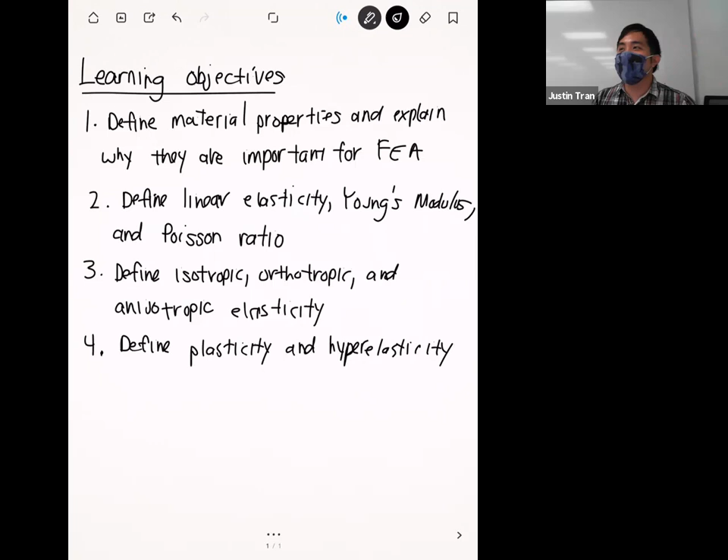Okay, right, so let's start talking about material properties.

Up to this point, we've talked about what I consider the ingredients to every finite element simulation. We talked about meshing for a little bit, we talked about boundary conditions last Wednesday. The last essential ingredient is material properties, and these are the ones that I think most people either forget or don't really put a lot of thought into. But there's actually a lot of depth and complexity with material properties, because especially nowadays, a lot of the cutting edge engineering doesn't use simple materials anymore — there's a lot more composite materials, more complex materials.

You have things like additive manufacturing, 3D printing, which has its own batch of material properties. So where a lot of times when you're first learning finite elements, you don't give a lot of thought to material properties, I'd say a lot of the cutting edge out there is thinking about how we can best model these materials in a realistic way.

All right, so first let's give some definitions to this. When I talk about material properties, I'm talking about the physical parameters of the material that affect how it will respond to external stresses.

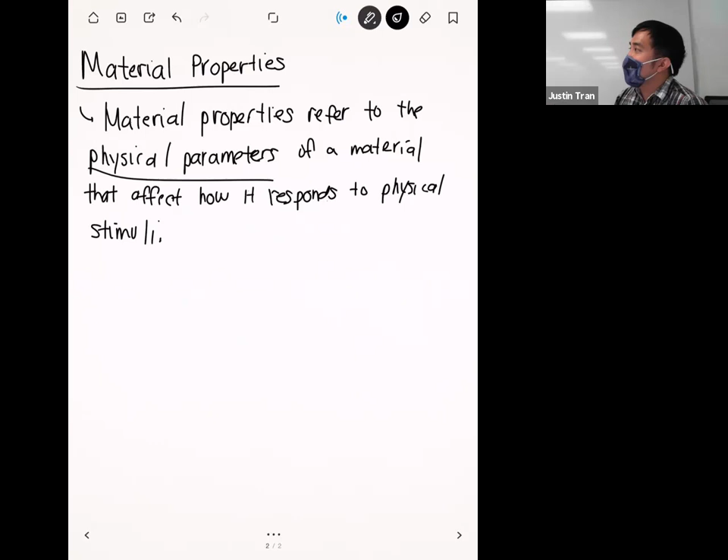So when we talk about material properties in finite elements, what we're interested in is what are the numerical, quantitative ways that we can describe and differentiate different materials from each other. That's what I refer to as physical parameters—those numerical values get plugged into the governing equation, and they're going to affect ultimately the finite element result that you get.

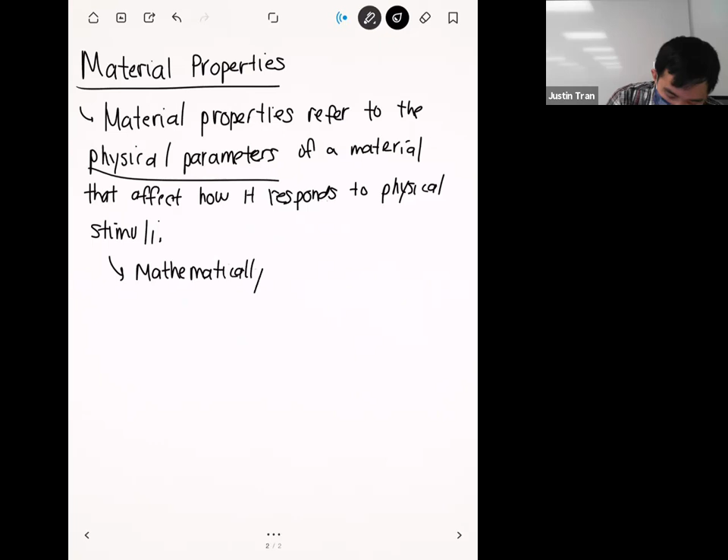And so mathematically, your physical parameter or material properties basically enter into your governing equations as modifying coefficients.

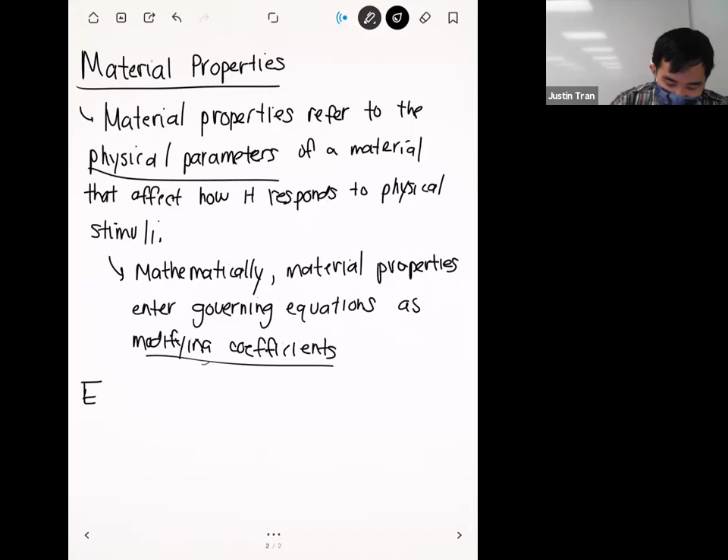The simplest example of this would be our stress-strain relationship. One thing that's central to linear elasticity is that we have this relationship between stress and strain, and the material property here that affects this solution is the Young's modulus—this E right here is a material property.

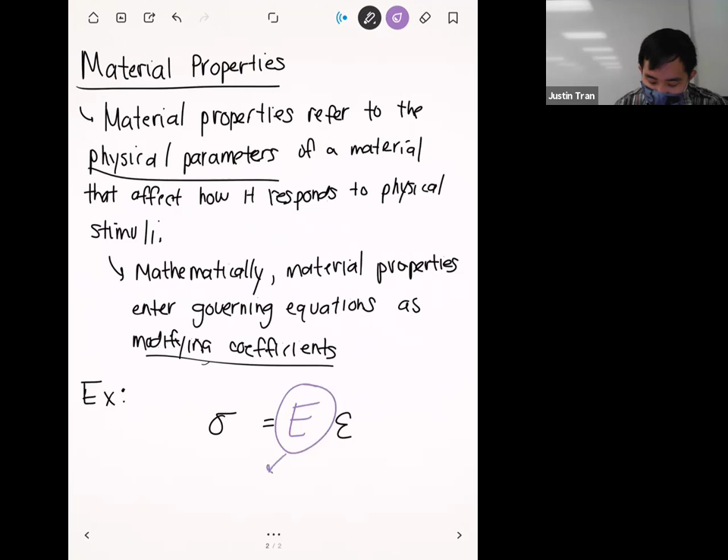It obviously affects our solution—depending on the Young's modulus, it's going to give us different values of stress for whatever values of strain that we put in. But it's also a quality or characteristic of whatever material we're using. If we're using aluminum, that's going to have a certain Young's modulus, but if we change the material to copper, that's going to have a different Young's modulus. So these are parameters that are characteristics of the material, and they affect our solution.

Those are the two ways that I think of material properties in finite elements. This is as simple as it gets—the properties of the material are these numerical values, but how they enter into the equation, that's something called a material model.

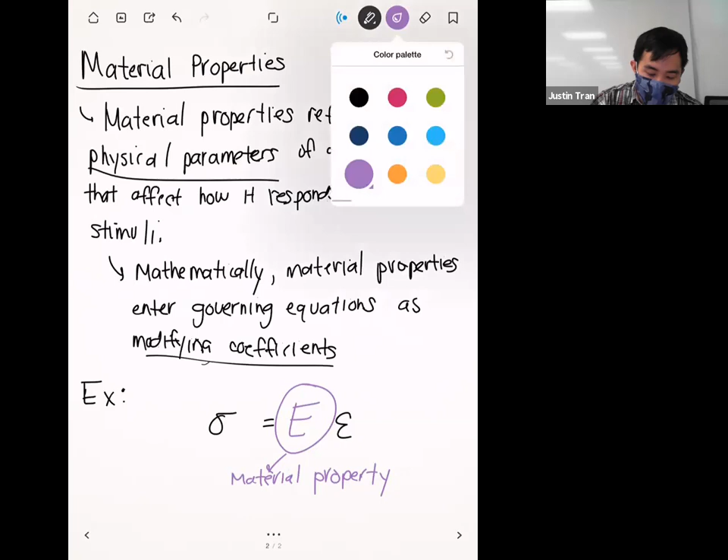We won't talk too much about material models because that's much more of a material science thing, but I will introduce a little bit of what tools are available.

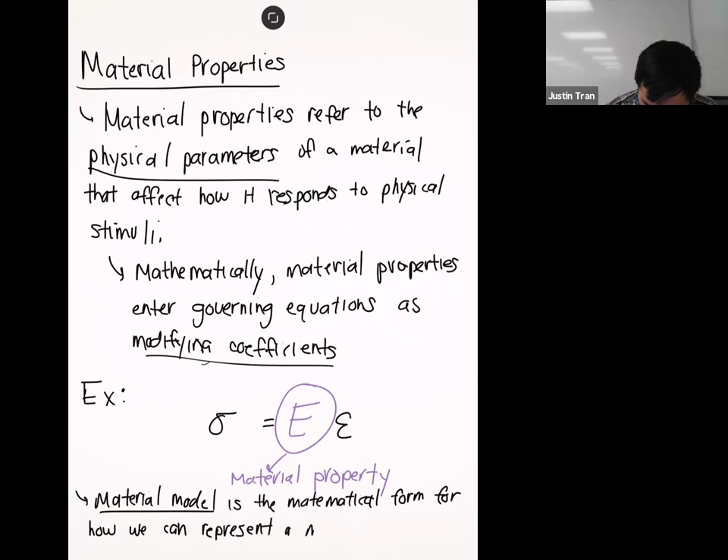Material models are things like linear elasticity, anisotropic elasticity, plasticity, and the last one we'll go over today is hyperelasticity. A material model is basically the equations that you use to describe the material, whereas the material properties are the numbers and the actual parameters that you plug into these equations.

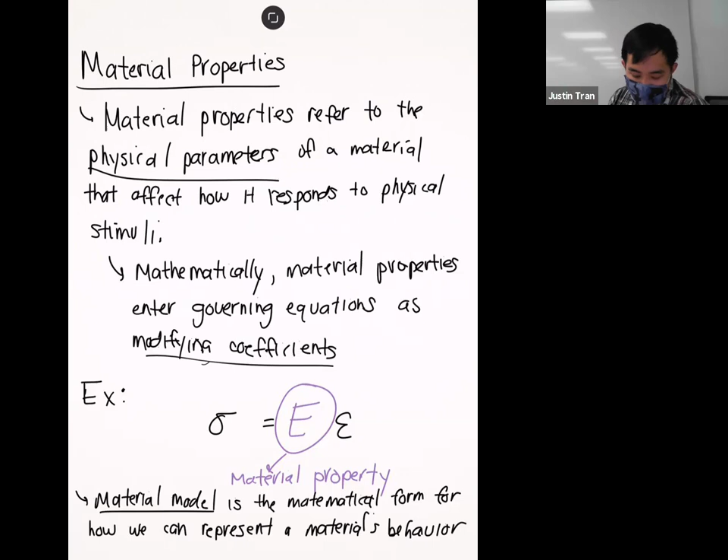As a simple example, this whole equation right here—this is the equation for linear elasticity, which we've talked about quite a bit up to this point. Linear elasticity as a category, as an equation, that's the material model. In other words, we're saying the material is going to follow this equation—that's what we call the material model.

Whereas the parameter that we plug in, which is the E, that's the material property. I want to make that definition clear because I'm going to be using those two terms quite a bit today. Knowing the difference between a material model versus a material property is really important, because within ANSYS there are lots of different material models available, and for each model you have to plug in the right parameters or properties to it.

Any questions on this? Okay.

The way that you usually interact with this in ANSYS is that you're going to probably look up your material in a database. Unless you're an alchemist or something coming up with new materials, which is pretty unlikely, a lot of times you're going to be working with materials that are out there. A lot of ways that finite element engineers use material properties is through databases.

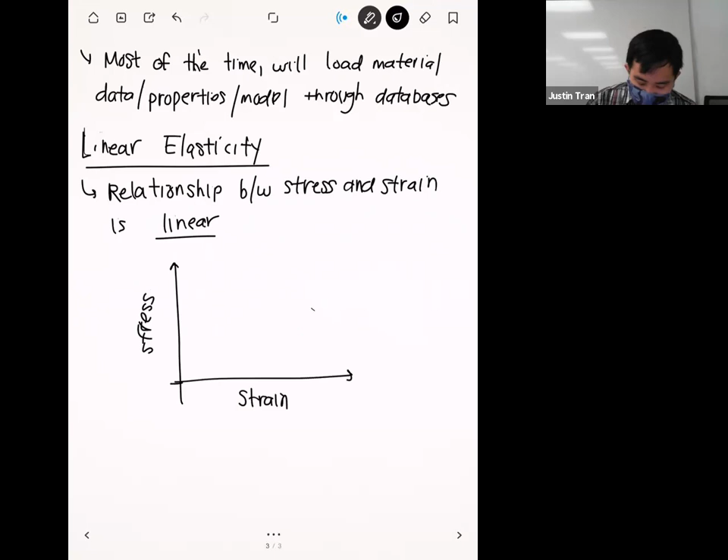Then we wrote out the equation for this. In 1D, we basically just have Hooke's law, where stress is equal to the Young's modulus times the strain. Linear elasticity is probably the simplest material model that you can have.

In linear elasticity, or at least isotropic linear elasticity, you only really need to specify two properties.

The first parameter is the Young's modulus, the one we have up there. Typically this has the symbol E.

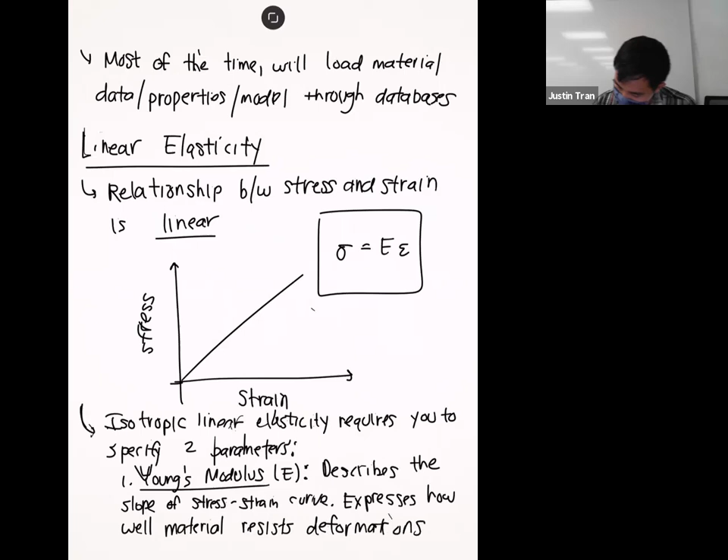If you have a material with a high Young's modulus, that tells you it's going to take a high amount of force to cause it to deform. Really strong materials, like a lot of the metals, like steel and aluminum, have fairly high Young's modulus. But compare that to something soft, like Play-Doh or string cheese. It doesn't take a lot of force to stretch string cheese, that's how they design it so you can pull it apart. Those materials will have a much lower Young's modulus because they provide very little resistance to deformation.

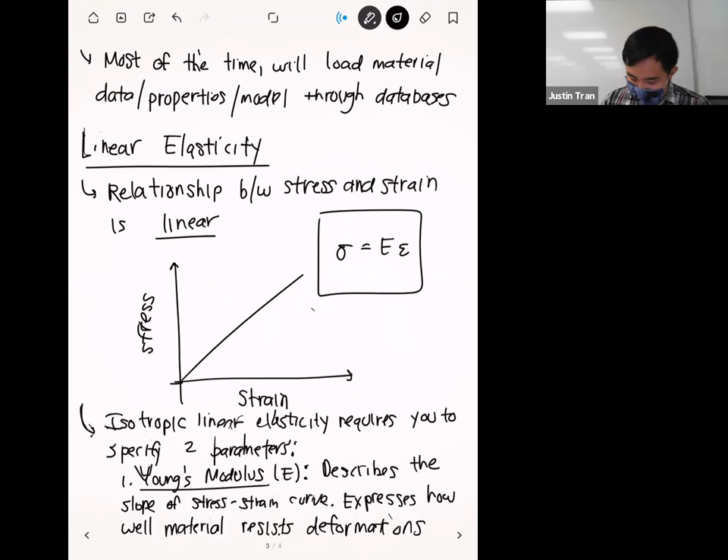Any questions on this? Okay, so that's the Young's modulus.

The other main property you have to specify is the Poisson's ratio. Poisson's ratio is strictly a multidimensional property. It never shows up in classical Hooke's law the way I always write it, because that Hooke's law is just for 1D. But whenever you have multidimensional elasticity, you need the Poisson's ratio.

The symbol we give Poisson's ratio is nu, this kind of fancy Greek V thing. I tried three times and it still looks like a V, but you've probably seen a nu before. So what Poisson's ratio measures is how much a material will deform in directions perpendicular to the load.

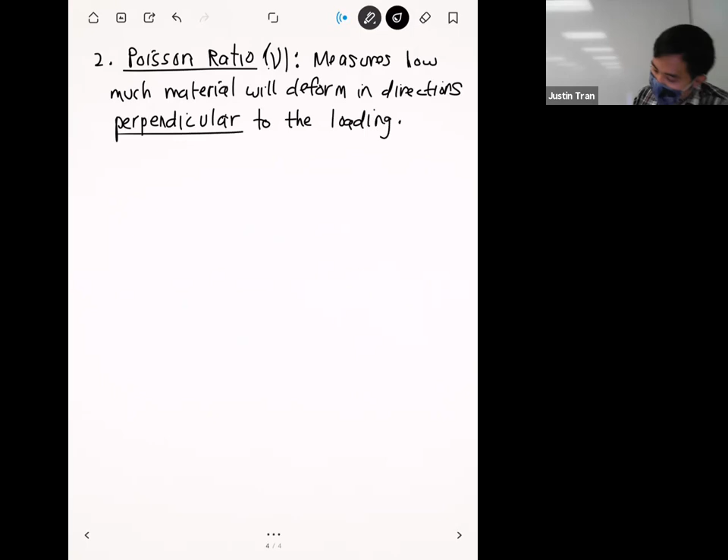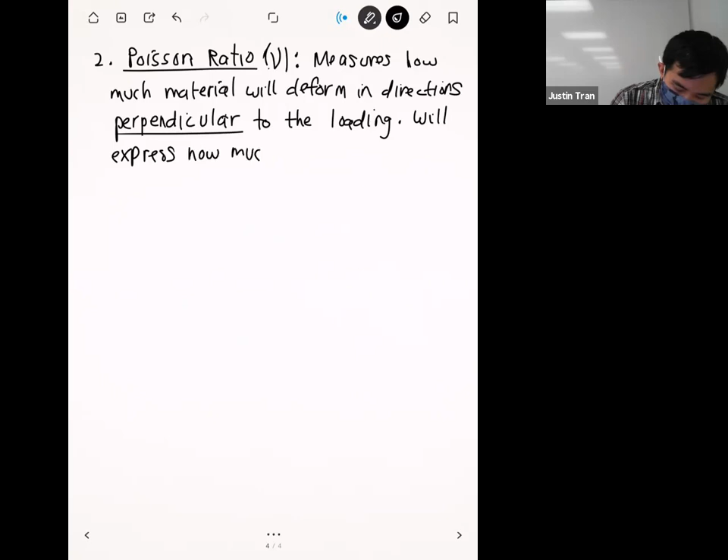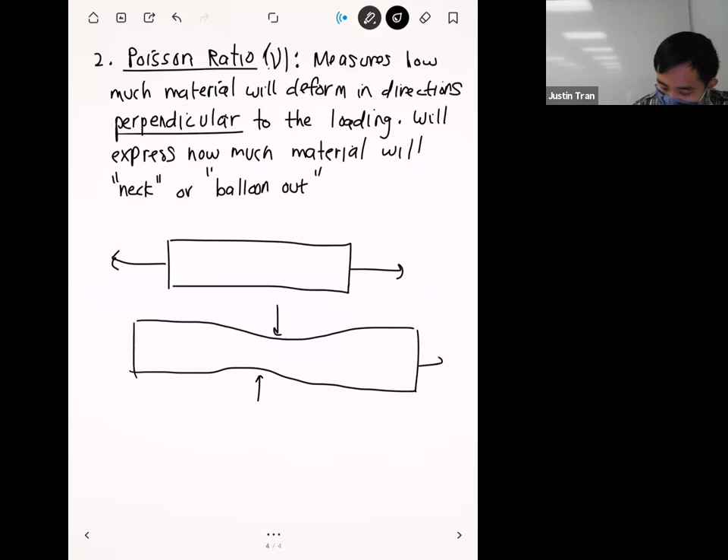I think the classical example will basically tell you how much the material will neck or balloon out. And I don't think those are the official terms, those are just the terms that I give it. So the classical example is, let's say you have a strip of material like this, and if you pull it like that, what the Poisson's ratio is going to tell you is how much this is going to happen. You stretch the material, naturally it's going to get longer. But because of conservation of mass, as the material gets longer, it also has to get thinner. This amount of necking right here is determined by the Poisson's ratio.

Poisson's ratio, because it's a ratio, doesn't have any units. And in fact, it's expressed as a decimal usually, like the range is between 0 and 0.5.

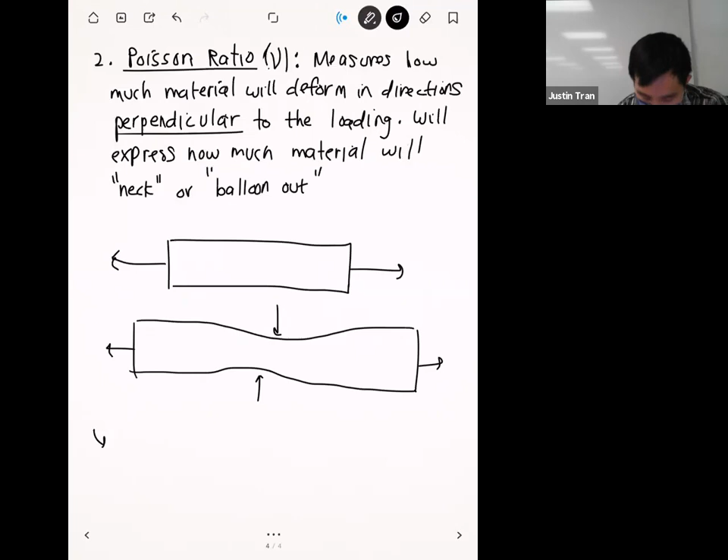So if you have a Poisson's ratio of 0.0, basically what this says is that there's going to be no perpendicular deformation.

And the max value for Poisson's ratio is going to be 0.5. And 0.5 means there's going to be lots of perpendicular deformation. And of course, that's not the technical term, that's just the Justin Professor Tran term, but that's how you can think of it.

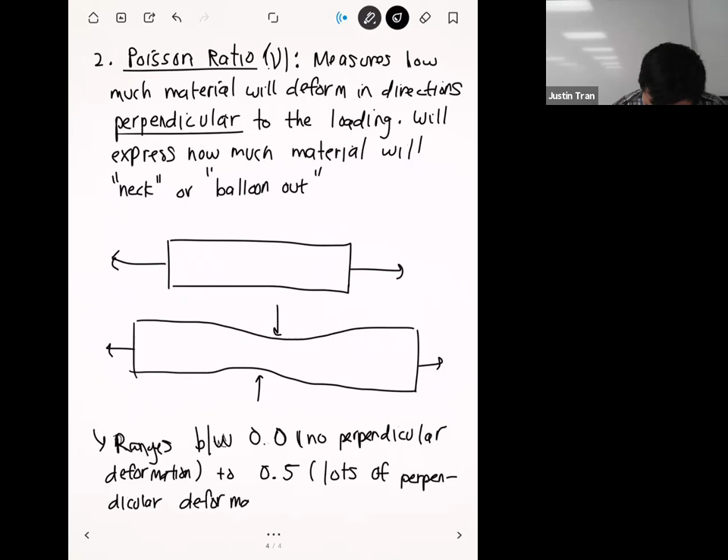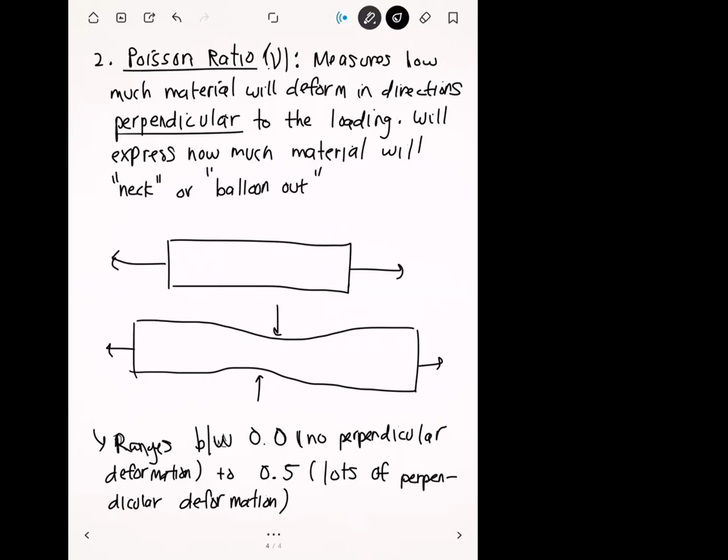So anytime you have an isotropic, linear elastic material, you need to make sure you specify these two properties, because otherwise it's not going to be complete. Remember when we did our activity 2, when we specified our aluminum 6061 material, we had to specify these exact two properties. And in that case, we looked up what the properties were in a table and we just filled that in. But ANSYS wouldn't have let us done anything if we didn't fill these two values. Any questions on Poisson's ratio?

I would say those two are the essential ones, so you have to fill those in. But there's actually a third material property that's with regards to shear. This is known as the shear modulus, which has the symbol G. The shear modulus kind of serves the same role as the Young's modulus, and it basically expresses how well this material will resist shear deformations.

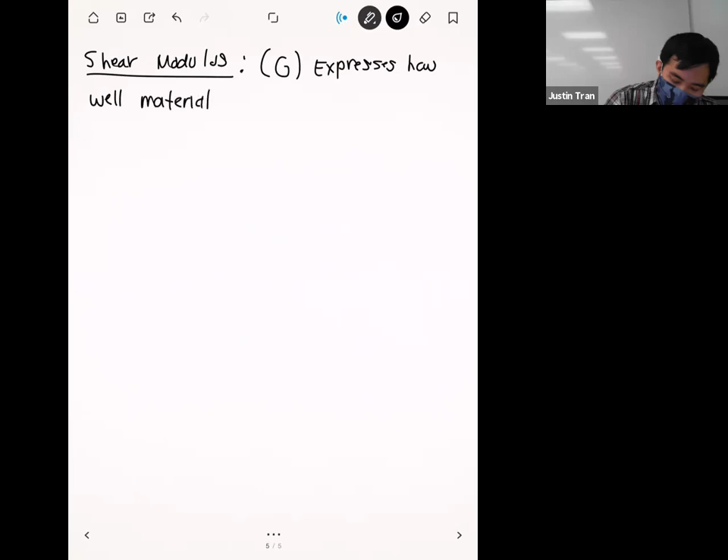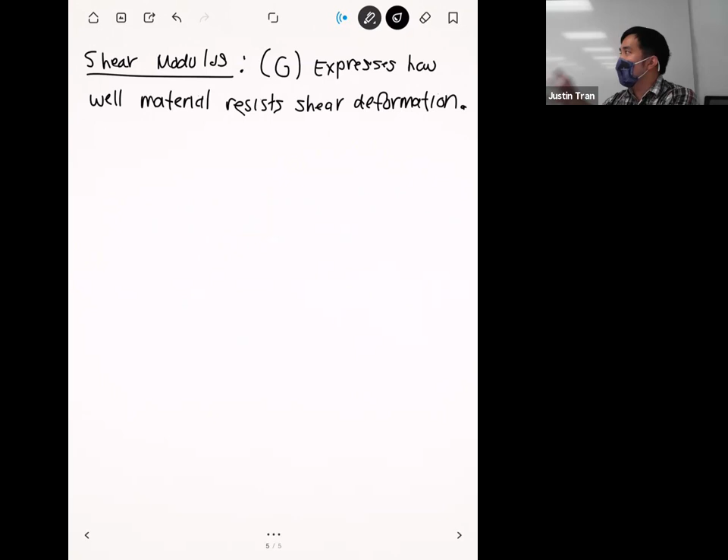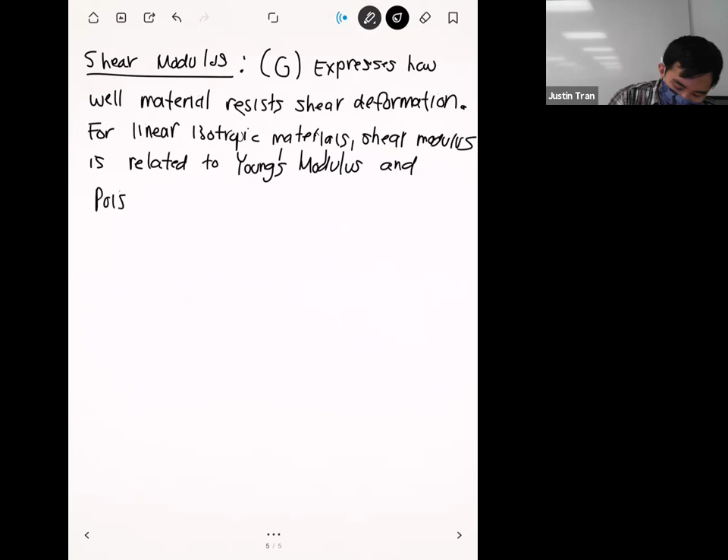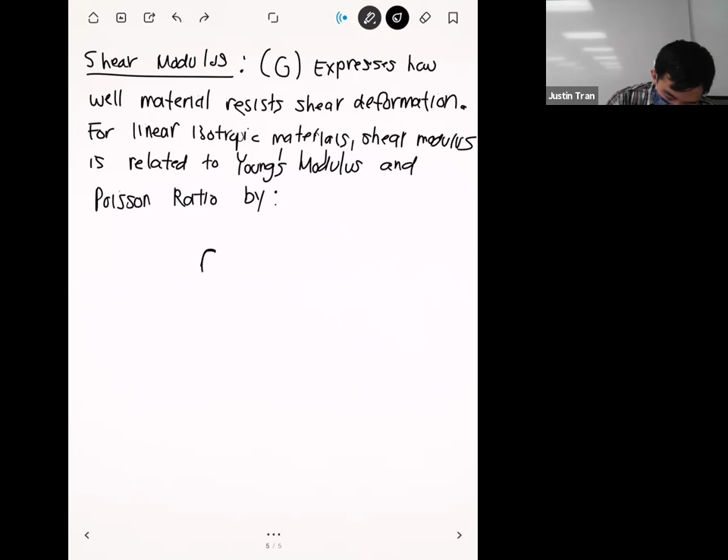This is another important part. Whenever you do any multi-dimensional linear elasticity, you need to specify the shear modulus. But you're probably wondering, in activity 2, we didn't specify a shear modulus, we didn't plug anything in. The reason for that is, for a linear elastic isotropic material, there is a formula that relates the shear modulus to the Young's modulus and the Poisson's ratio. So for linear isotropic materials, shear modulus is related to Young's modulus and Poisson's ratio by the formula G equals E divided by 2 divided by 1 plus nu.

And ANSYS knows to do this already. So if you input the Young's modulus and the Poisson's ratio, then ANSYS will automatically compute the shear modulus using that formula.

So in the chat, the question is, how do we determine if a material is linear and isotropic? Is there a table somewhere online? No, it's a good question.

Whether a material is linear and isotropic, it'll say so in the material data sheet. If you look up a certain material that you want to use, it'll tell you what the most common material model is for that. That's determined by the material, and it's not something you can determine just by looking at the material and saying that's linear and isotropic. The way this is determined is usually by a series of laboratory experiments where people characterize a material. And for the ones that pass the test for linear and isotropic, then they're listed as such.

It gets difficult when you're using materials that don't have a lot of data out there. This is becoming more common with people 3D printing a lot more stuff, and not all of those materials have data sheets, or the data sheets can be hard to find. That's usually when things get a little more difficult. But if you're using more classical materials, there should be a lot of data out there. For most metals, you're going to find material out there. For all the common woods, you're going to have material out there. A lot of common plastics, there's going to be some place out there too. But in a world with a lot of composite materials and new manufacturing techniques, it's getting a bit harder, but you can also make some educated guesses as well.

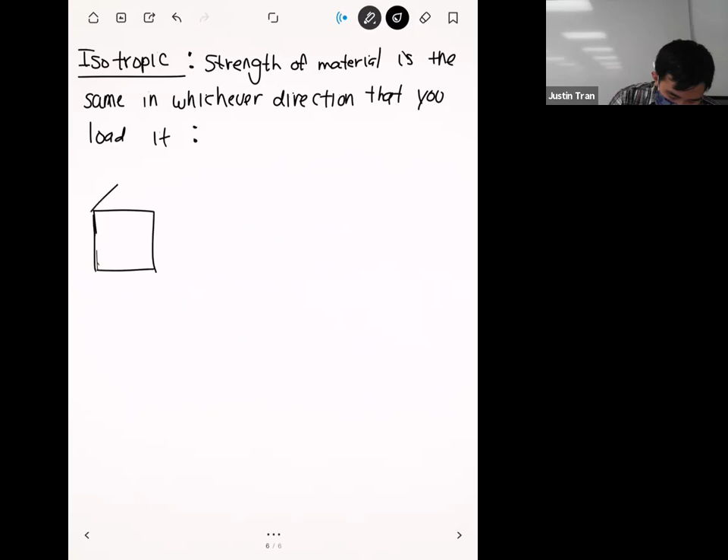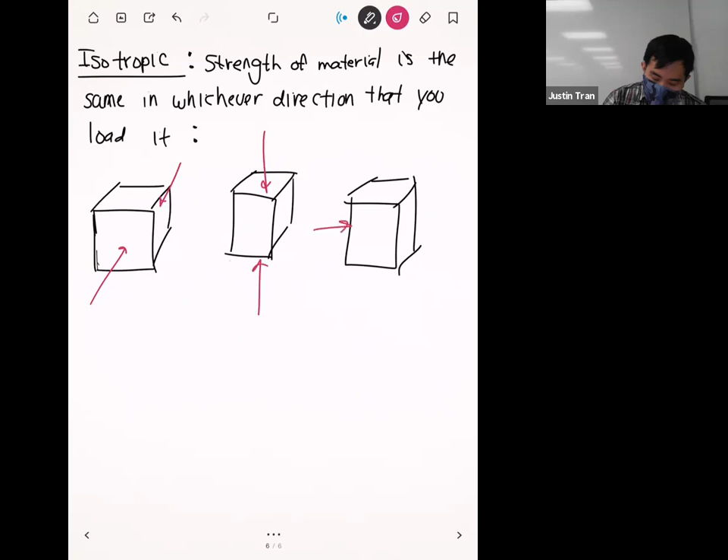If you have a cube of isotropic material—I'll draw the cube in three different configurations—the strength of the material, or the absolute amount of deformation you see, is going to be the same no matter if you load it in this direction, this direction, or this direction. In all those cases, because the strength of the material is the same in all directions, you're going to get the same amount of relative strain.

This is actually really useful because, if it weren't for isotropicity, you'd have to really pay attention to which direction the loading is coming from versus some other features of these materials.

This is especially important for materials that have fibers running through them, like wood. Wood came from a living tree at some point in its life, and the tree has fibers that run through it. The direction of those fibers changes its strength in different directions—if you load things in the same direction as the fiber, it's going to be really strong, but if you go in different directions, it's not as strong. We'll talk a bit later about how we model that.

But first, I want to talk about plasticity. Staying on the topic of linear elastic materials, we know the stress-strain relationship starts out as a linear line. But once the strain exceeds the elastic limit, the stress-strain relationship changes—instead of being a nice line, it starts to flatten out a little bit.

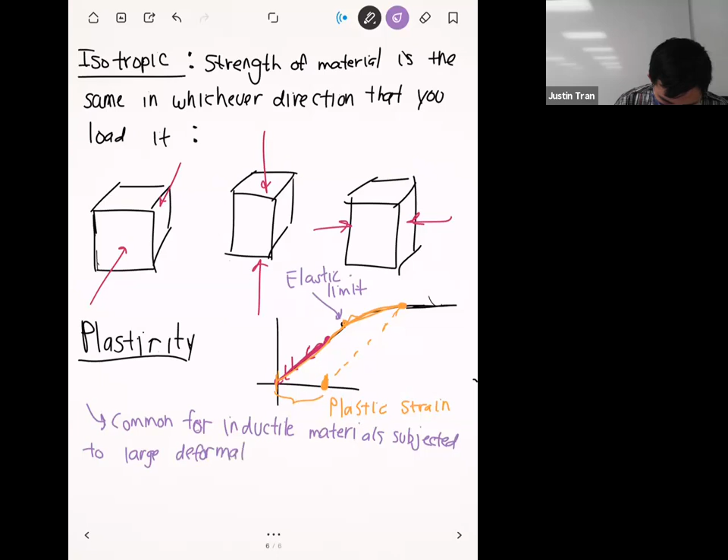And so if you have plasticity, or if you have plastic deformation that's occurring in your model, you need to make sure you explicitly include that in ANSYS.

So if you think back to activity 2, when we specify the material properties for that aluminum, that aluminum is not equipped to do any kind of plastic deformation, because the only material properties we assigned to it were those for isotropic linear elasticity. So if you wanted ANSYS to account for plastic behavior, you have to manually include those properties within ANSYS.

And I believe we talked about it later. Actually, I'm going to skip around a little bit. Any questions on this?

And so this graph, you guys have seen it before in a strength of materials class. But this is only relevant for 1D stress strain. In ANSYS, in finite elements, oftentimes we're working with 2D or 3D models. And so in those situations, how does ANSYS determine whether you've exceeded the elastic limit? What you use is the equivalent stress, which we've seen before.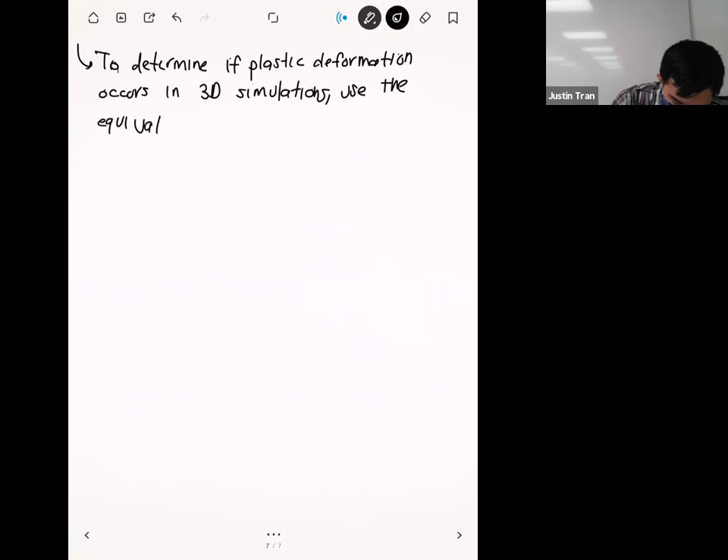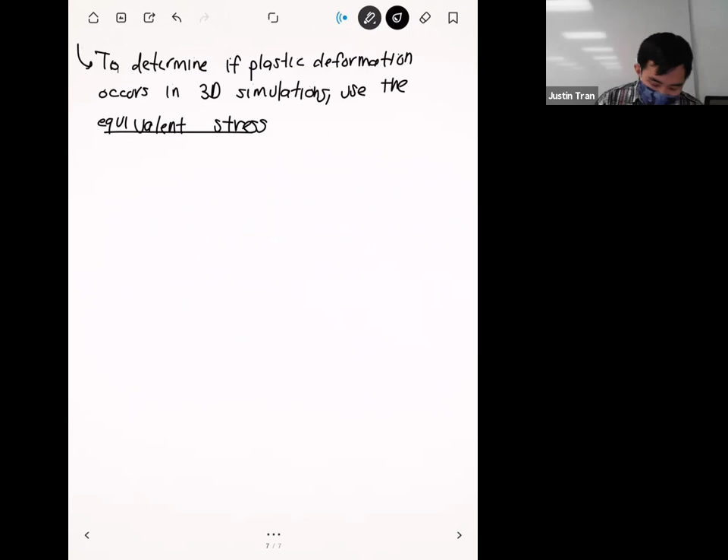Another name for the equivalent stress is the von Mises stress. Named after the dudes that discovered it, I guess. I don't know if he's related to the supermarket, but it's possible. All right, so the formula for the von Mises stress is square root of one half of sigma xx

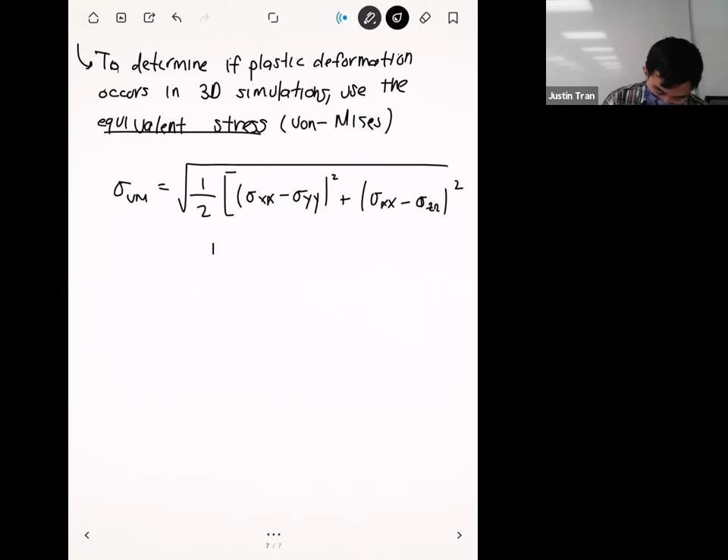minus sigma yy, where these are the normal stresses in the x and y direction, squared, plus sigma xx minus sigma zz squared, plus sigma zz minus sigma xx squared. And I think there's also more contributions here from the shear stresses as well, though unfortunately I don't have it written down.

But I think we have the formula for von Mises stress in a previous set of notes too. Oh, these papers are out of order. That's why. I wondered, I was like, why am I doing stuff out of order?

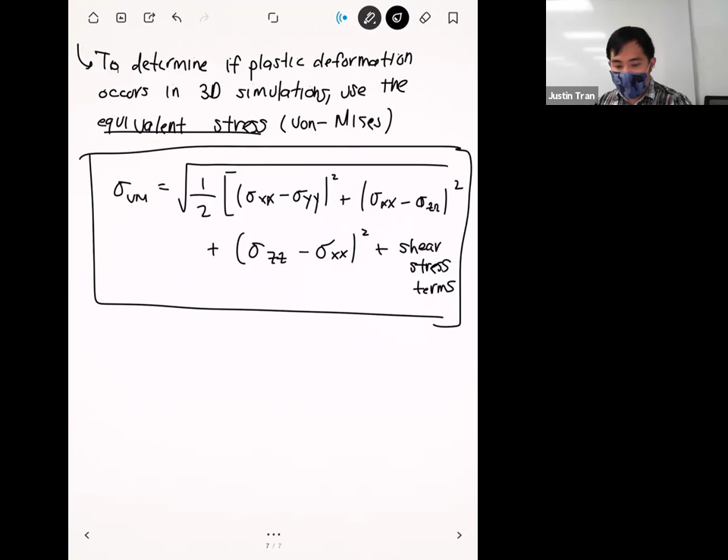All right, let me get organized for a second. Because in a lot of materials, whenever you specify plastic behavior in a material, you also have to specify how the material will harden after plastic deformation.

And so what hardening refers to is how much the elastic limit will increase in a material after plastic deformation.

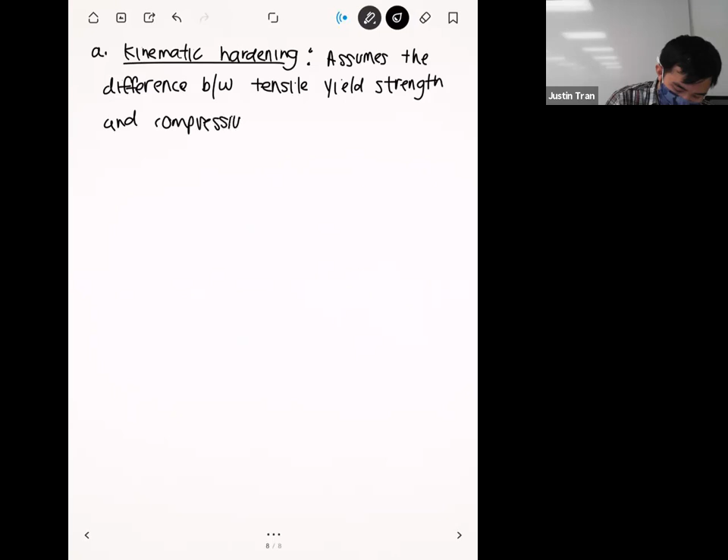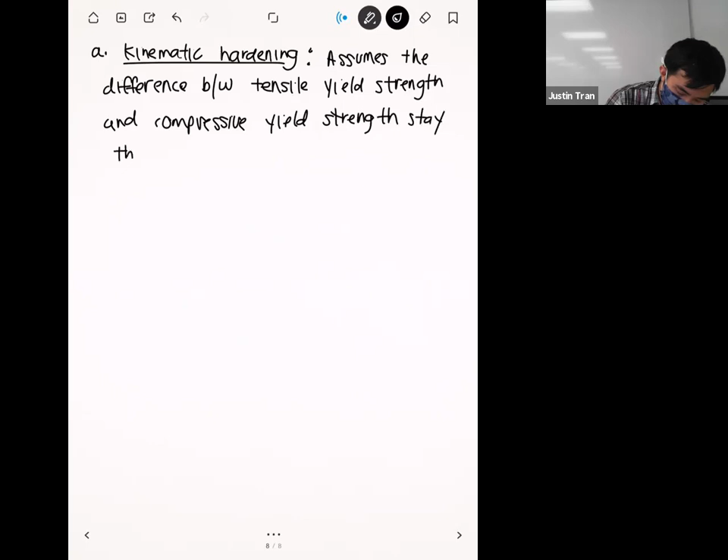And the other option for this is isotropic hardening. In isotropic hardening, this assumes that the tensile yield strength and the compressive yield strength have the same magnitude.

This is important because after plastic deformation, the elastic limit is going to go up. Whether the tensile yield strength or the compressive yield strength stay the same or different is determined by this. So if you're not sure, I would say the default option you should choose is isotropic hardening.

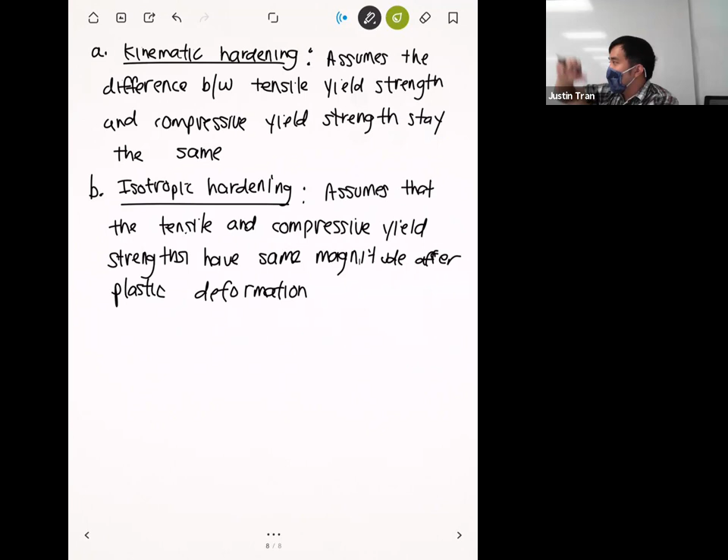In isotropic hardening, what happens is that if the elastic limit goes up, in most cases it's going to be tensile. So if the tensile elastic limit goes up, then the compressive elastic limit will also go up, and they're going to be the same in magnitude. So if you're not sure what to pick, I would go with this one because it's a little bit easier to interpret.

But if you have a material that has different properties in compression and tension, one particular material that does this is bones in your body. Bones are much stronger in compression than they are in tension. So if you know your material has a certain property like that, that might be a good one to use kinematic hardening for. But for most cases, for most metals and things like that, I think isotropic hardening is a little bit easier to do.

That's one thing you have to specify in ANSYS. When you specify plasticity, you have to specify what kind of hardening behavior that you expect. And the other thing you have to specify in ANSYS is how the shape of the stress strain curve changes.

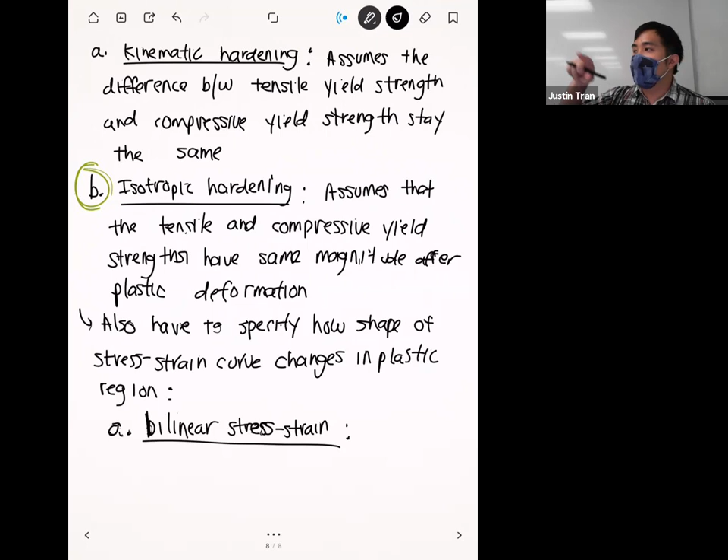This one you also have two options for. The first option is known as bilinear. In bilinear stress strain, what you assume is that once you've reached the elastic limit, the stress strain relationship just becomes another linear line, albeit with a lower slope than the previous one.

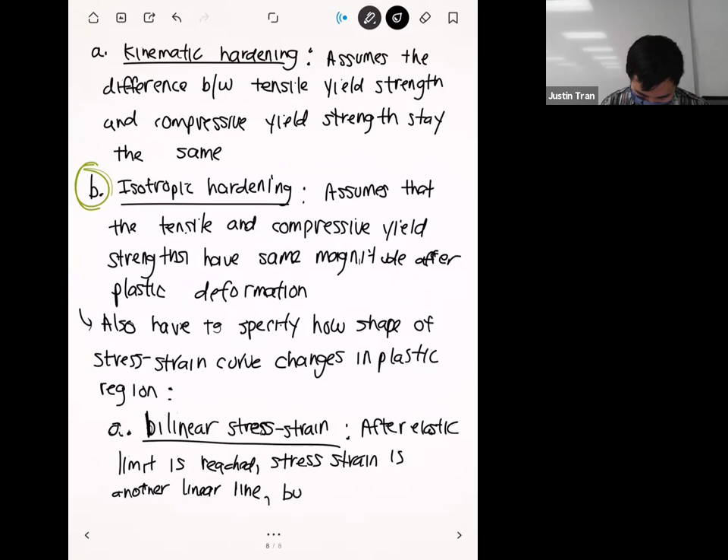So the bilinear stress strain relationship is a lot easier to specify, just because you only have to specify the slope of another line. I'll draw what that looks like on the next page. But before we get there, are there any questions on this?

That's the simplest one because it's the least amount of data you have to put in, but it's also the most crude one. For most plastic deformation that you guys have seen, the relationship looks more curved, so if you try to approximate that with a straight line, it's never going to be perfect. But it's a nice, simple way to do it.

The other way you can define the plastic stress strain is through a multilinear approach. In a multilinear approach, what you're doing is specifying basically multiple lines or multiple data points in the plastic region.

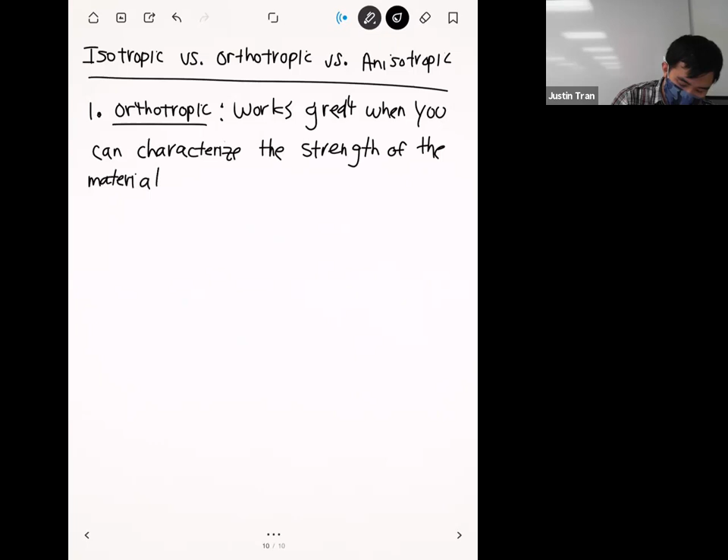Orthotropic material models are great when you can directly specify the strengths in each of the cardinal directions. If you can describe the strength in the X direction, the Y direction, and the Z direction, this works great. One example where orthotropic is used commonly to describe material properties is for wood.

Remember, with wood, we talked about earlier, that it has a very distinct fiber that runs down the length of the wood, and the wood is going to be a lot stronger in that direction than in the other ones. So if you're working with wood in your finite element simulation, you can arrange the wood such that the fiber runs in either the X, Y, or Z direction, and then assign different strengths to those directions.

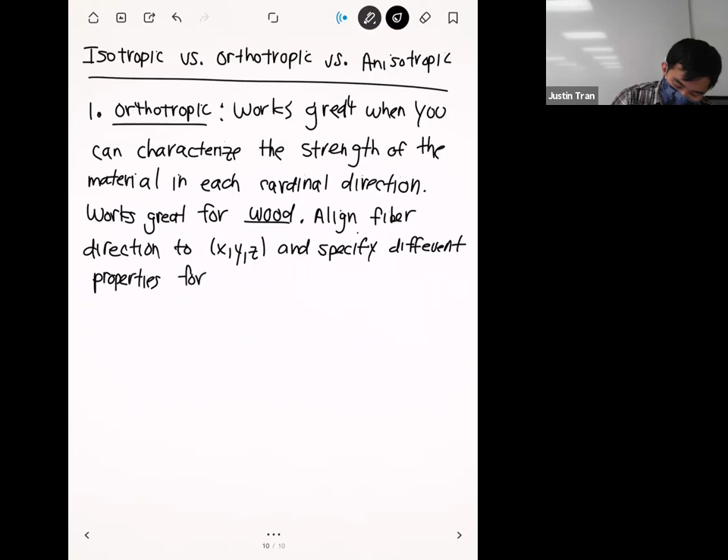I hesitate a little to say this because I don't know if it's standard, but I think this is also commonly used for 3D printed materials too. With additive manufacturing, a lot of material properties depend on which direction you're printing the material, because 3D printed stuff is built in layers. Whichever direction you're building it up in is usually going to be weaker than the other directions. So in those situations, you'd specify the printing direction as having less strength, because that's the direction where stuff gets layered on top of each other.

So for orthotropic materials, these require more material properties. If you think back to when we were describing isotropic materials, we only had two material properties we had to specify: the Young's modulus and the Poisson's ratio, because we basically assumed it was the same in every single direction.

For an orthotropic material, you actually have 9 material properties that you have to specify. So it's a lot more. Choosing an orthotropic material, you have to be prepared to specify those material properties—it's a decent amount more.

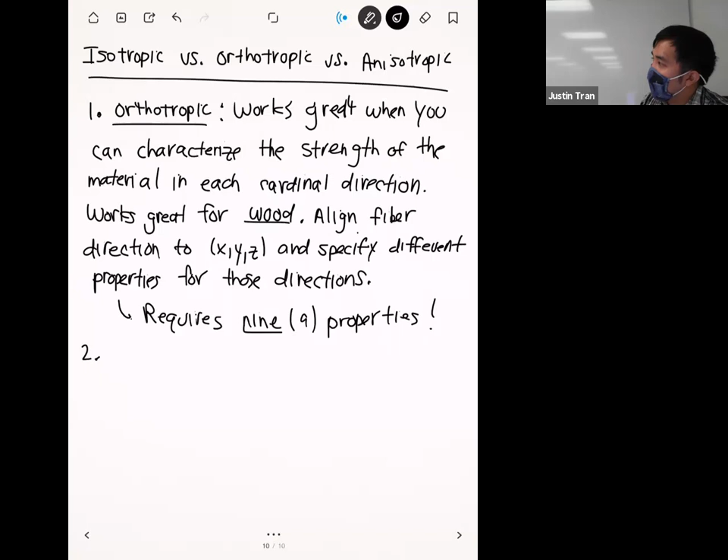So that's an orthotropic material. Out of the non-isotropic materials, I'd say orthotropic is probably the most common, just because in those situations you have a direction you can specify, and you can specify different material properties in those directions. But if you want to go completely general, with no assumptions on the material model at all, then what you end up with is a completely anisotropic material.

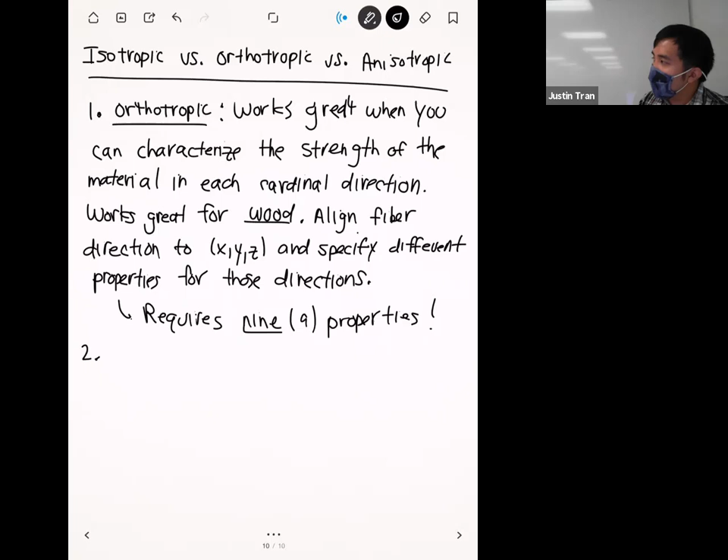Because even in orthotropic, when we're specifying different strengths in different directions, we're still making some assumptions and some symmetry arguments about how that material is behaving. For anisotropic, we make no assumptions at all. This is the most general case.

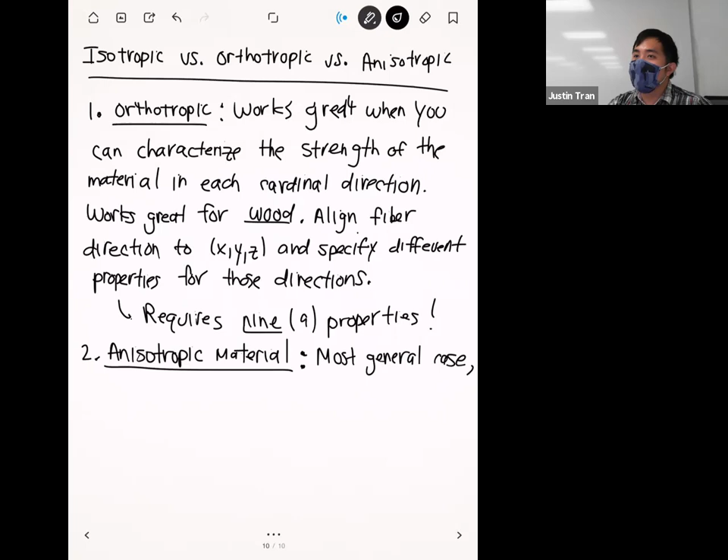You're going to have to specify more than 9 material properties. Does anyone want to guess how many material properties you have to specify for an anisotropic material? 21—you looked at the notes. It's 21, yeah. So it's a lot, and honestly I can't even think of an anisotropic material that's practically used. It's much more of a theoretical marvel, I guess.

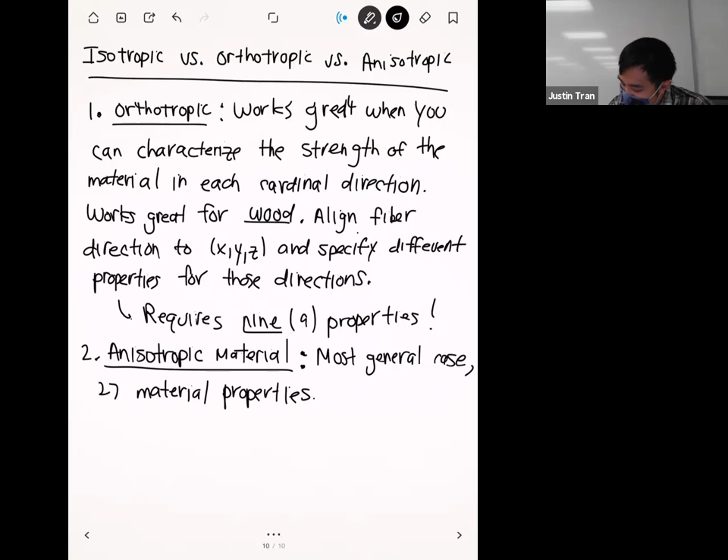In theory, you can have a material that behaves so weirdly that you would need an anisotropic one, but in most practical cases you're not going to get this. In the notes, I said only the weirdest, strangest biological materials—say you have some active components like cells causing weird stuff to happen, or maybe some very complex composite—those might be anisotropic materials. But practically speaking, at least personally, I've never worked with one.

But in the case where you don't want to make any assumptions on the material, you can use this. 27 is usually a crazy amount of material properties, and a lot of those material properties don't have that strong of a physical intuition.

You would basically just be plugging it in exactly as it was from a research paper, which is not a bad place to be, but also not a great place, because then you're kind of blindly trusting numbers that you got from the internet, which is not the best thing to do when you're doing finite element research. Even if you're working with an orthotropic material, a lot of times these properties have been studied before, so there's published data out there. It's just up to you to find that published data and use it in your simulations. Any questions on this stuff?

All right, there's one more material model I want to go over, and that's hyperelasticity. Compared to everything we talked about today, it's a bit of a black sheep, because it takes a different approach to modeling the material. Honestly, this is something I would personally like to learn more about. I know the basics of working with it, and I worked with it before in my research, but the finer details of how these actually came about and a lot of the derivations I've personally never seen. So I'm not the biggest expert on this stuff, but the concept is really interesting. Hyperelasticity is a more general framework or material model that you can use to model large deformations.

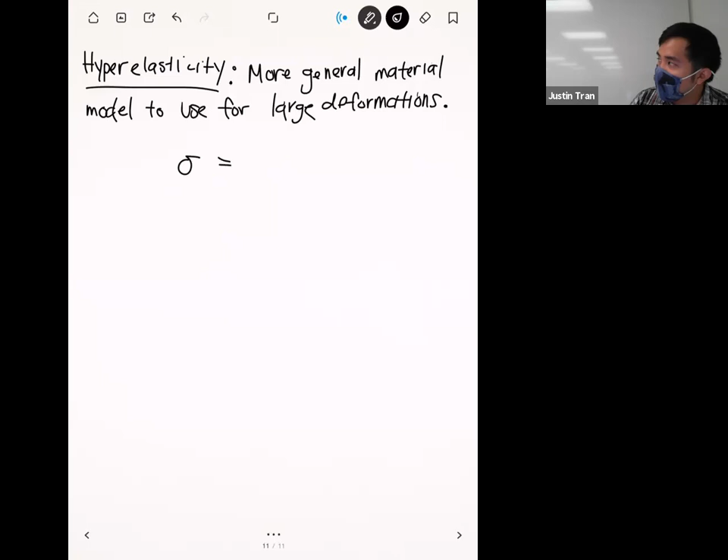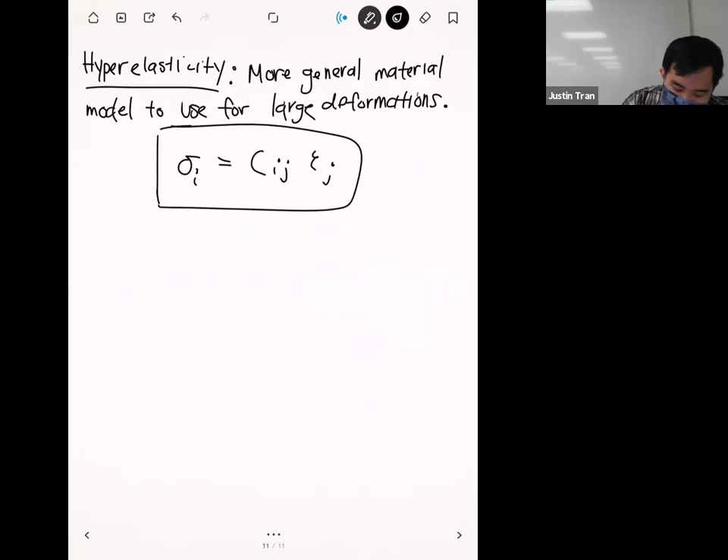Up to this point, and this is true even for orthotropic and anisotropic materials, we basically had this relationship between stress and strain. The stress is algebraically related to strain. Before we had Hooke's law for the simple 1D case, but in the most general case for anisotropic materials, you're going to have something like this. What you have here is basically an algebraic relationship between stress and strain. This is not hyperelasticity, this is everything we've been doing up to this point. So this is one way to define it: for linear elasticity, orthotropic, anisotropic materials, the relationship between stress and strain is algebraic.

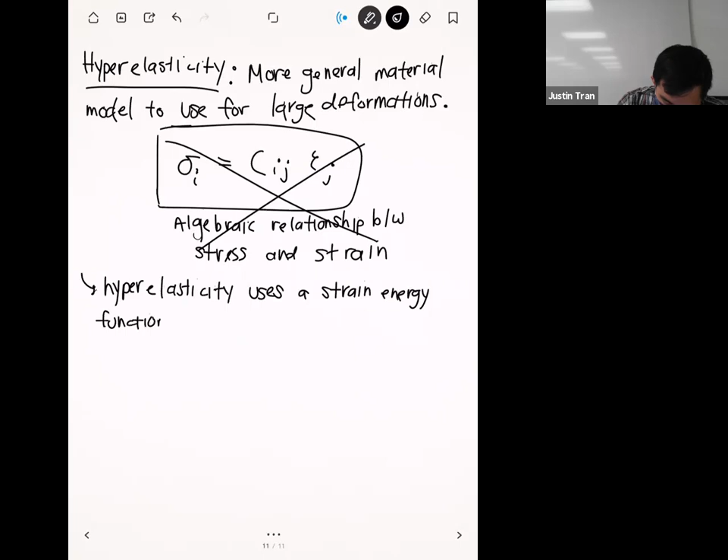Hyperelasticity says let's form a relationship between stress and strain that's not algebraic. The way hyperelasticity works is that it uses something called a strain energy function, and it uses this to define the relationship between stress and strain. Because what you can do is take the derivative of the strain energy function, and that will give you how stress and strain are related. As for what the strain energy function is, basically it states that the material has a certain amount of potential energy.

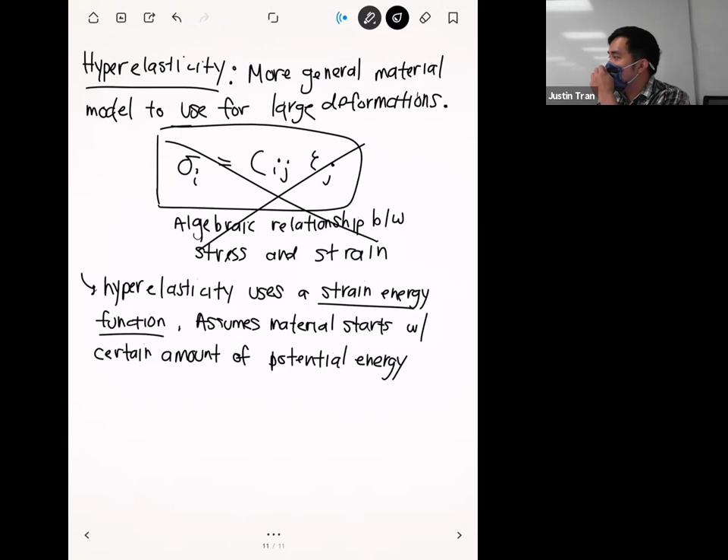This potential energy tries to be conserved as the object goes through different deformation states. This is a little bit of a different approach to stress and strain. For each deformation state, basically what you're looking for is the minimum of the strain energy function. Mathematically, what's going on underneath the hood is that when you apply an external load, the strain energy function is computed, its derivative is taken, and it tries to find the deformation configuration that minimizes that strain energy. I wish I could explain it a little better than that, but that's the limit to how I understand it.

But basically, this allows for very non-linear stress strain relationships, non-linear and I would say very complex. We looked at a little bit of non-linearity already with plastic deformation, but with hyperelasticity you can get really crazy stress strain curves.

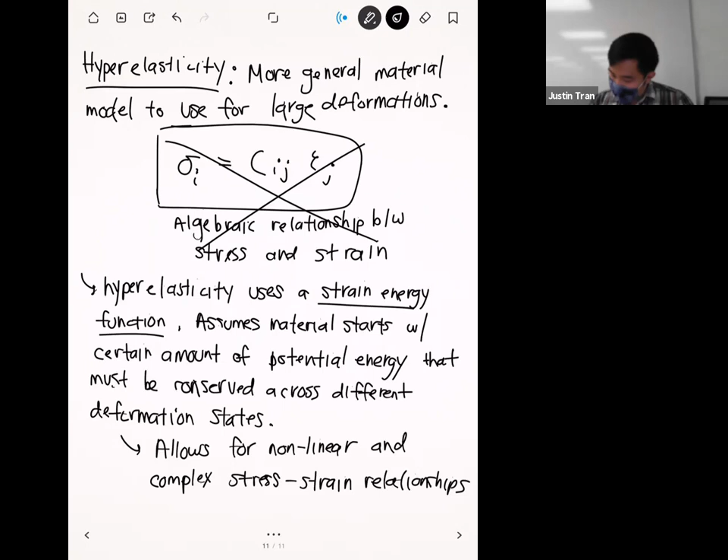The downside of hyperelasticity is that it assumes no plastic deformation will take place, and it often requires you to read academic papers just to understand what it's actually doing. So the difficulty for hyperelasticity is a lot higher, but the potential is there for a lot of really interesting deformations. For some materials, they're honestly just best described with a hyperelastic material model versus a linear one. Any questions on this so far?

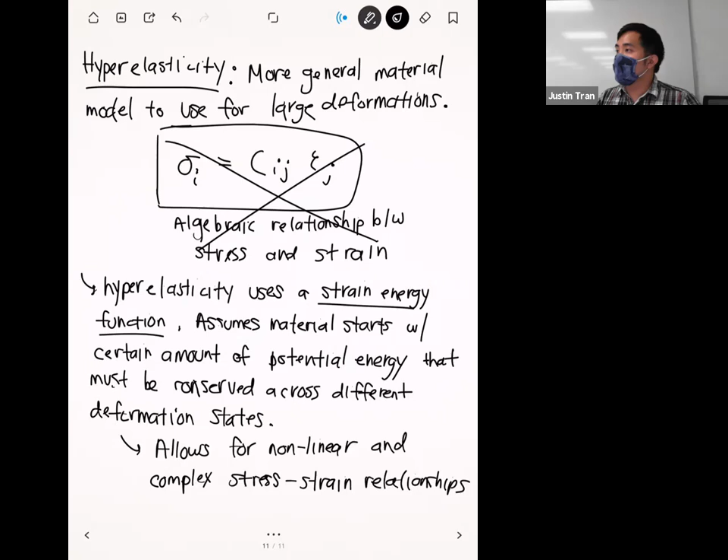And some materials actually behave like this. So, a lot of my past research was on blood flow, and part of that research is modeling how the blood vessels themselves, the walls of the physical blood vessels, deform in response to pressure changes in your blood.

Research has shown that blood vessels are not a linear material. They actually follow a stress-strain curve that you can't fit a linear curve to. I have a little experience using these kinds of models, but it's not easy. The software I was using had some hyperelastic material models, and I was just plugging in values. I got interesting results, but I don't think I fully understood it, which is not a great place to be, especially when presenting for your dissertation.

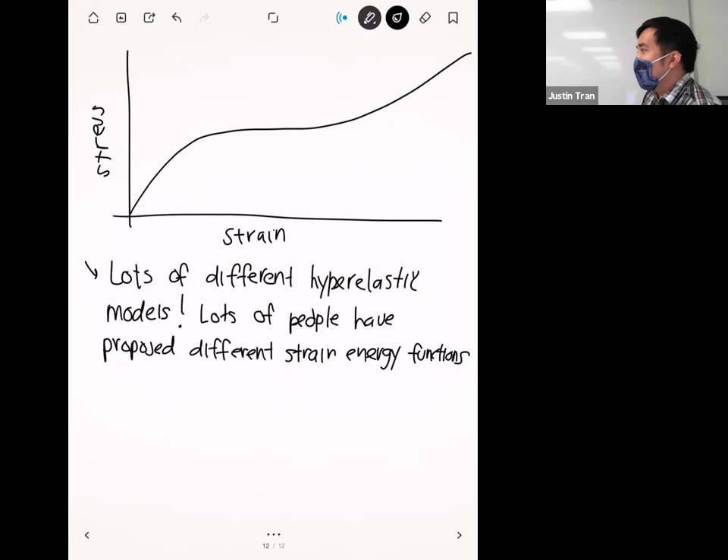I used two of these when I was in grad school. But when I looked up hyperelasticity in ANSYS, I was actually in for a bit of a shell shock, because if you look at the list of all the hyperelasticity material models in ANSYS, it's a long list, and I don't even recognize most of the stuff in there. So I'll give you some examples.

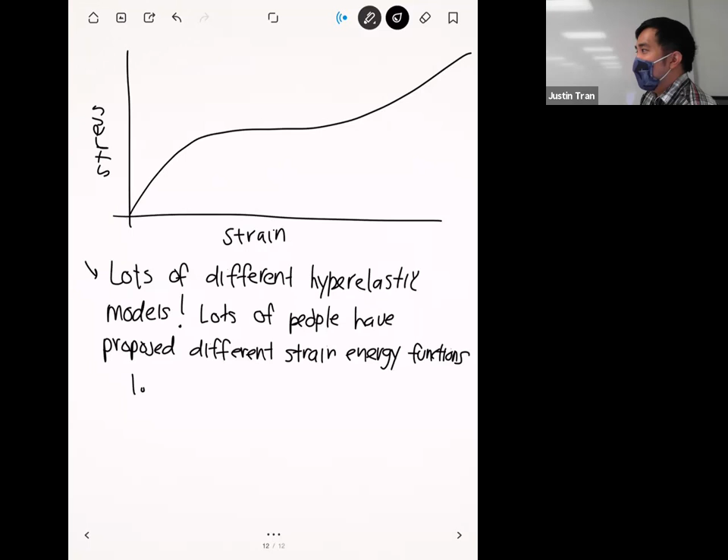The unfortunate thing with hyperelasticity is the same problem we encountered before: whoever came up with these strain energy functions just named them after themselves, so the names mean absolutely nothing. One example I've worked with is the Neo-Hookean model.

ANSYS has this one, I've seen it. Another one I've worked with is called the St. Venant-Kirchhoff model. You remember St. Venant from before? I guess he worked with Kirchhoff and developed this strain energy function. Another one I know is popular for biological tissue is called the Mooney-Rivlin model. I believe these two are also in ANSYS as well.

So those are common. And of course, you read those and have no idea what they mean because they're named after people, and no one cares about the people—we just want to use the equations. So it's one thing where you have to do your research into what material you're using and what material model makes the most sense. Or at least what model people have used, and read their justifications for why they used it for that material, then you can use the same thing.

Any final questions on this before we wrap up for today?

Okay, so that's material properties. For most people, with finite elements, you don't really think about it a lot, but the rabbit hole goes really deep with material models, especially when you start talking about hyperelasticity.